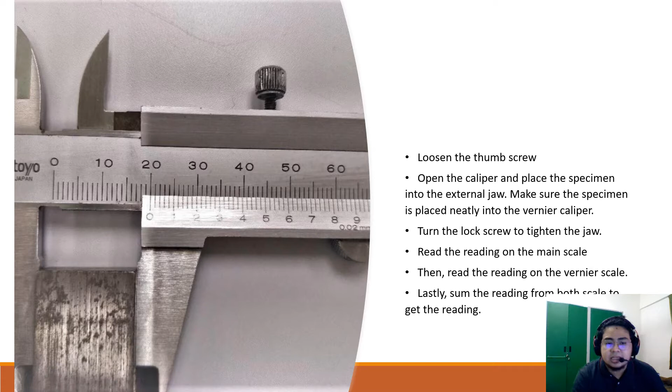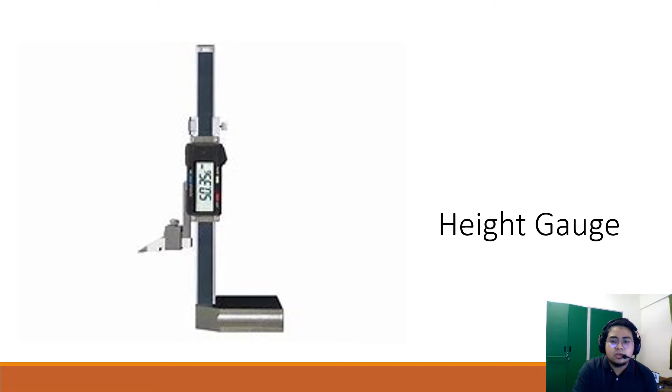For question 2, I'll be explaining about height gauge, micrometer, horizontal optical comparator, and vertical optical comparator. So first of all, on how to use height gauge. So first thing is that we need to place the height gauge on a flat surface table. Next, we must make sure the height reading before starting using it is 0.00 mm when the arm or jaw is based at the table.

If there is a reading error, then we need to take the reading error first and add it to our last reading. Third step, we need to lock the arm in place after positioning your workpiece or object that you want to measure. Next, we must turn the adjustment clamp to tighten it. Firstly, we read the main scale. As we can see on the slide, the reading on the main scale is 79 mm.

Then we read the vernier scale. The vernier scale in the slide is 0.36 mm. So we can sum it up: 79.36 mm. If there is a reading error, as an example, a reading error of 0.04, then we must add the final reading with the reading error. As an example, 79.36 plus the reading error 0.04, then the total is 79.40 mm.

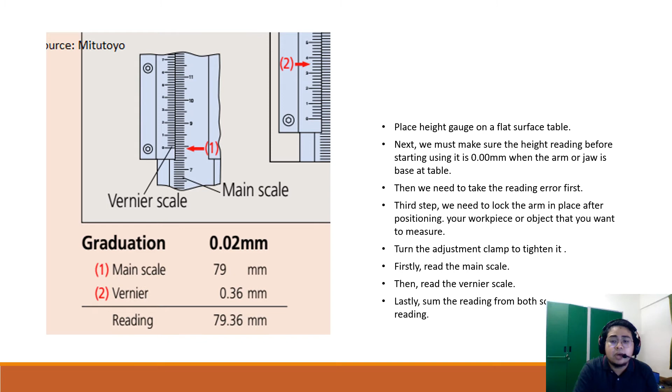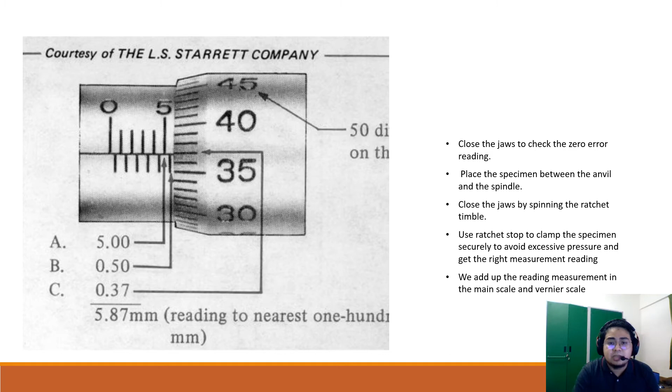Next, I'll be explaining about micrometer. So, first of all, we close the jaws to check the zero error reading. Then, we place the specimen between the anvil and the spindle. We close the jaw by spinning the ratchet thimble. And we use the ratchet stop to clamp the specimen securely to avoid excessive pressure and get the right measurement reading. And lastly, we add up the reading measurement in the main scale and vernier scale.

So on reading the main scale and vernier scale, first of all, we must identify on the main scale. There are two things that need to be identified. First of all, we can see in the slide, the micrometer stops below 6 and after the half line. So here we can see it is above 5 and it is above 0.5.

So it is 5 mm and then we add one line that is 0.5. So on the main scale we get 5.5. And then on the vernier scale, we can see that we got 0.37 mm. So after we add up, all the reading will be 5.87 mm.

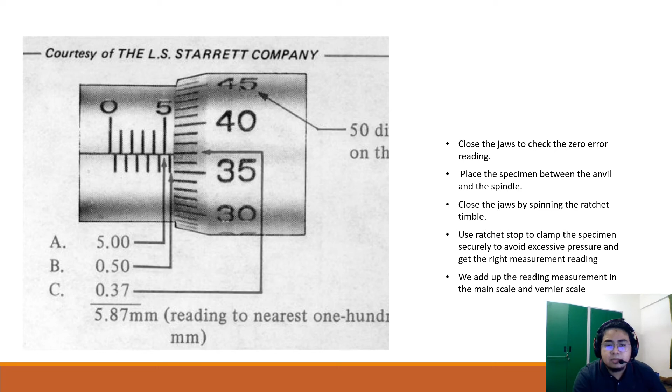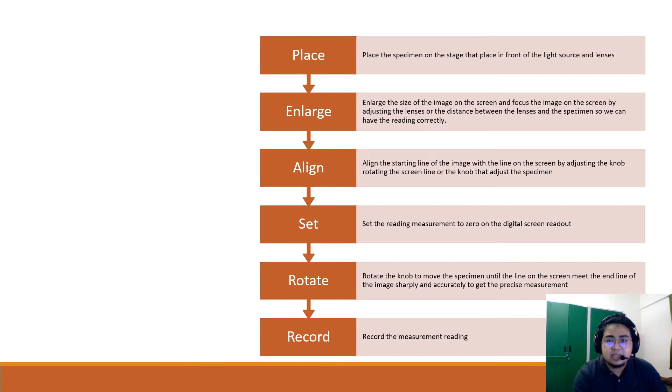Next is horizontal optical comparator. So first, we place the specimen on the stage that is placed in front of the light source and lenses. And then we enlarge the size of the image on the screen and focus the image on the screen by adjusting the lenses or the distance between the lenses and the specimen so we can have the reading correctly.

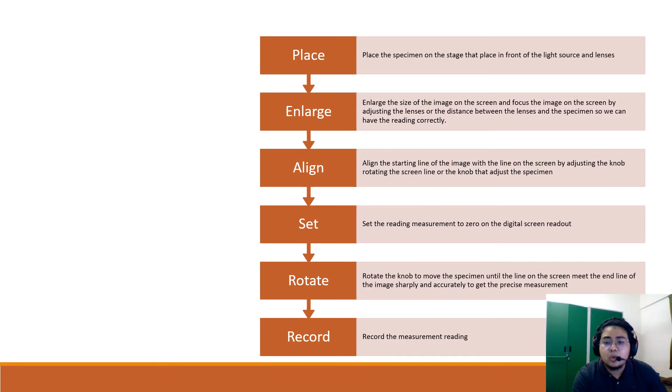Then we align the starting line of the image with the line on the screen by adjusting the knob rotating the screen line or the knob that adjusts the specimen. Then we set the reading measurement to 0 on the digital screen readout. After that, we rotate the knob to move the specimen until the line on the screen meets the end line of the image sharply and accurately to get a precise measurement. Then we record the measurement reading.

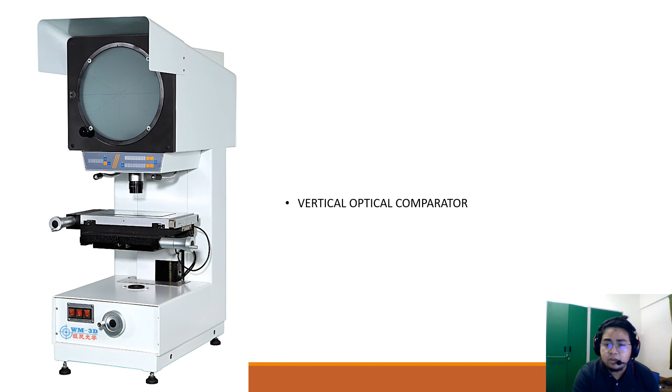So, on using the vertical optical comparator, it is the same as the horizontal optical comparator, but the position of the specimen is different. So first we place the specimen on the stage, that is the glass stage. Then we enlarge the size of the image on the screen and focus the image on the screen by adjusting the lenses or the distance between the lenses and the specimen so we can have the reading correctly.

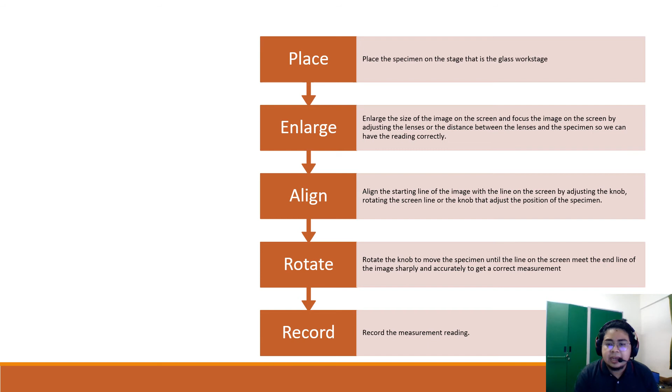Then we align the starting line of the image with the line on the screen by adjusting the knob, rotating the screen line or the knob that adjusts the position of the specimen. Next, we rotate the knob to move the specimen until the line on the screen meets the end line of the image sharply and accurately to get a correct measurement. And lastly, we record the measurement reading.

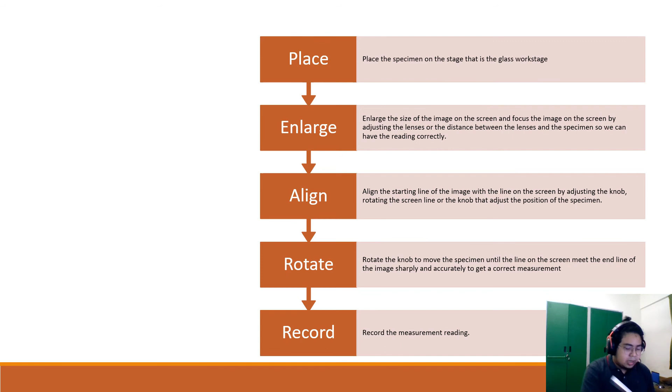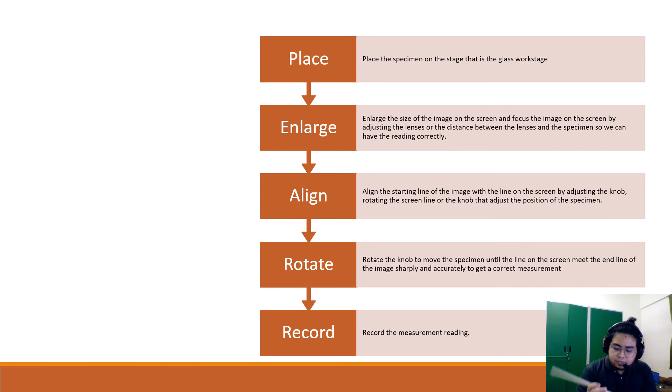So for the next question, I'll be showing you question 3. So on question 3, we will be using a ruler as a vernier caliper and an eraser as a gauge block. So first of all, I will measure the length, width and thickness of this rubber. So the first, length, so this is the length of the rubber here. So here we get 19 mm for the length.

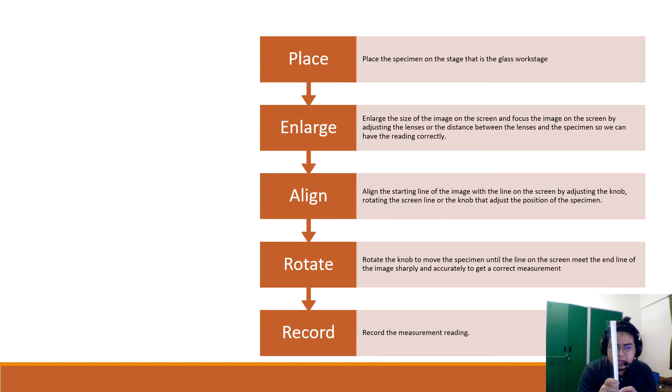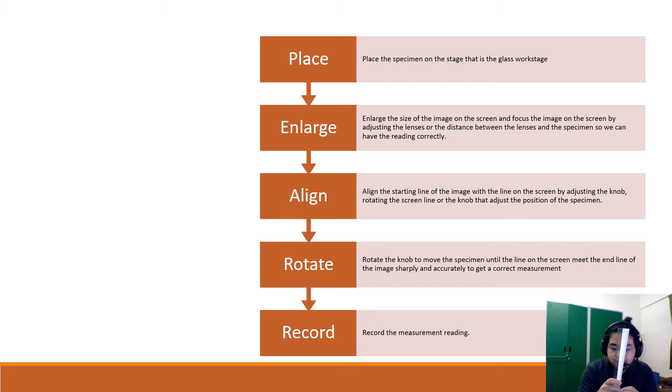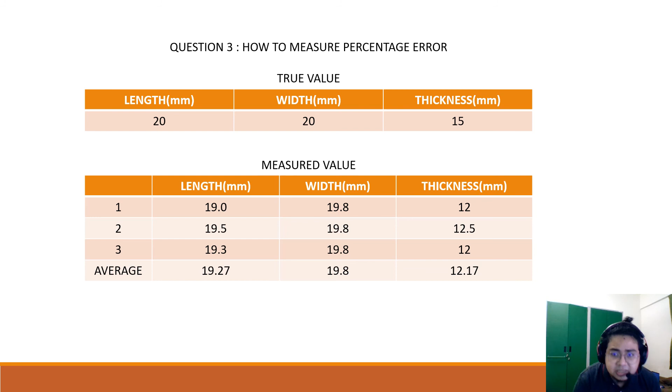For the width, we got 19.8 mm, and for the thickness, we got 12 mm. So, first of all, on how to measure the percentage error. So first of all, we have the true value that is given. The true value is 20 mm for length and width, and the thickness is 15 mm.

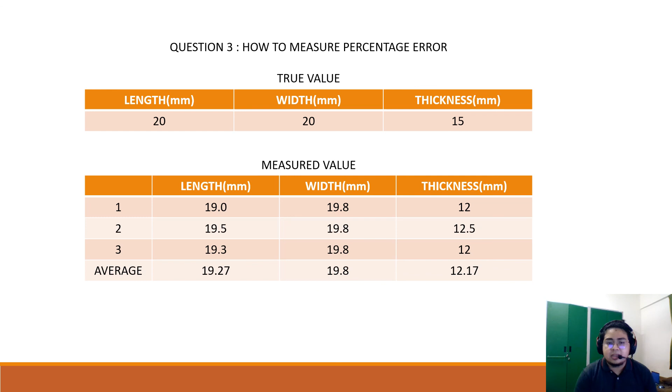So I have measured this eraser using this ruler 3 times. So this is my reading. So the average reading for my length is 19.27. The average for width is 19.8 and the thickness is 12.17. So to measure the percentage error, we must use this formula. Percentage error value equals average measured value minus true value, divided by true value, times 100%.

So for the error value of length, I got 3.65%. For the width it is 1% and the thickness is 18.87%. So that is all from me for my lab test.